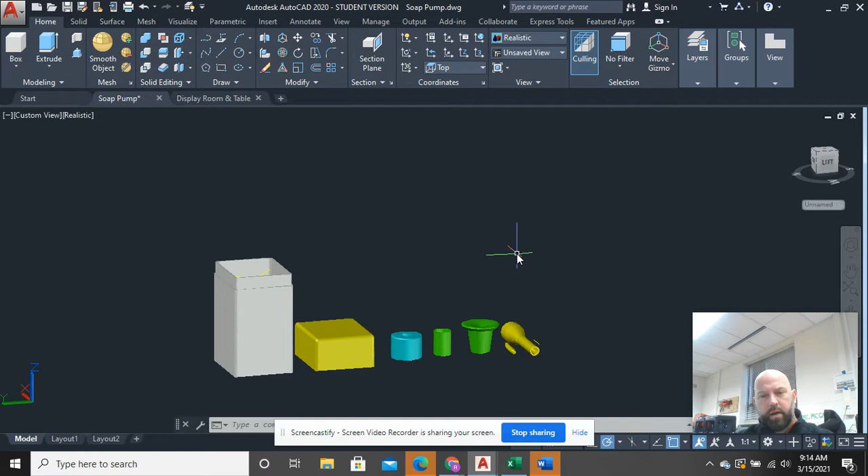So the next thing I have students do is make a table. Here's my soap pump parts that are going to be put together and then rendered. That'll be my final thing that I do.

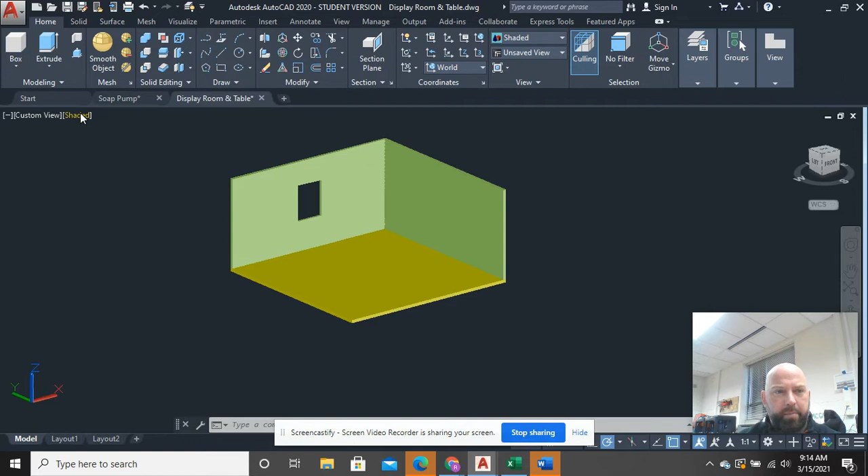I'm going to document how some of these parts were drawn because they're all kind of full-scale pieces. Here's a little room I drew, and I'm going to plunk a table down in this room, then put my soap pump on top of that. That way I can render everything and add lighting.

First thing I'm going to do is draw a table. I'm going to go to a top view and draw my table, utilizing the corner of the floor and just go from there.

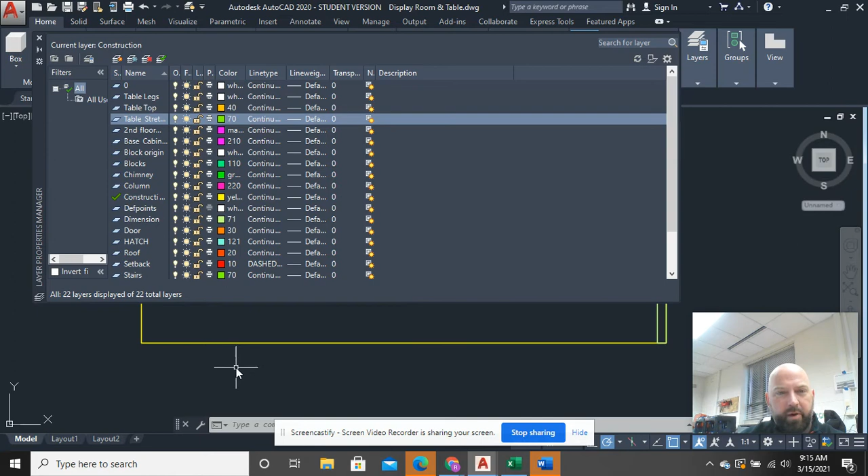Now on layers, I would make one called table legs, keep that white, make another one called tabletop, and make that one orange. I'll make one more and call it table stretcher, stretcher being like the skirt piece that would go around the frame. I stole this template from something I used for an architecture class, so everything is in feet and inches.

For table legs I'm going to use 3x3 legs and probably 1.5 inch stretcher pieces. So I'll go at 3, 3, and enter.

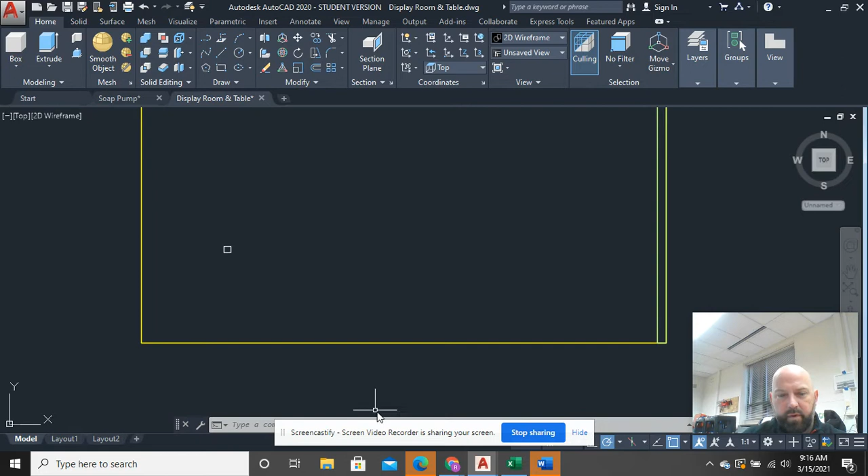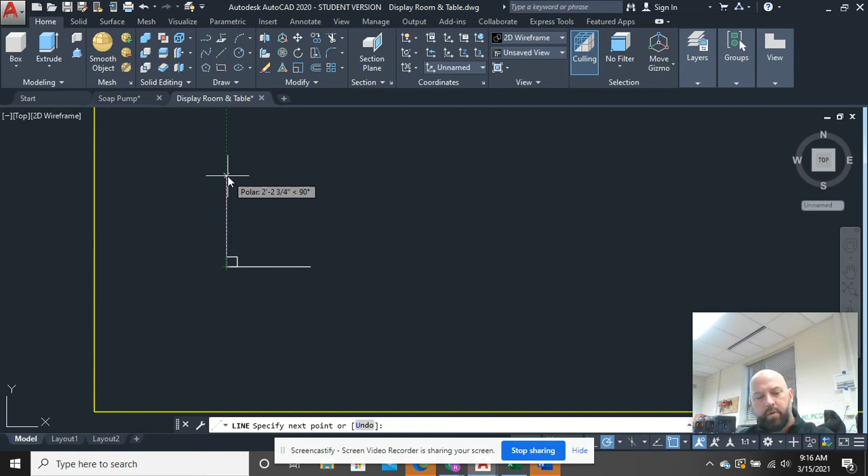I'm just going to draw a line. From outside to outside on this table, I'm going to make it 24 inches, and I'll make this one 24 as well. That way I can just go ahead and copy one leg.

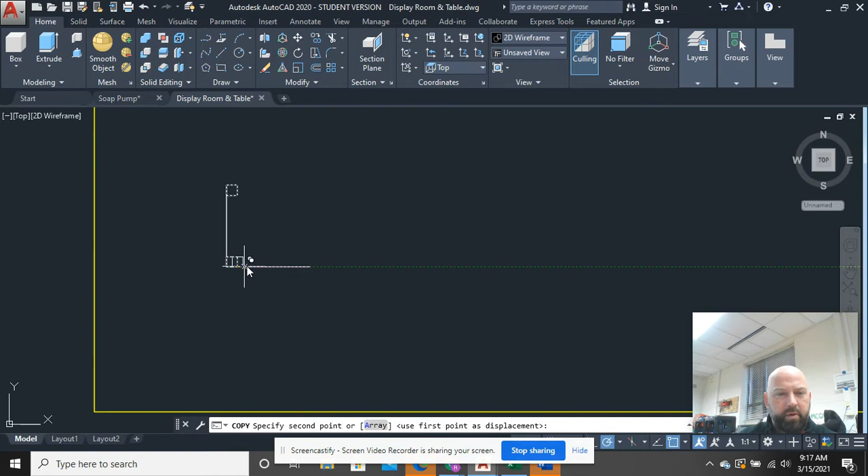For this first video, I'm just going to do this table in two pieces. First, all the two-dimensional parts you'd need to make the three-dimensional structure. Piece of cake. So now we have 4 legs that are all 24 inches apart.

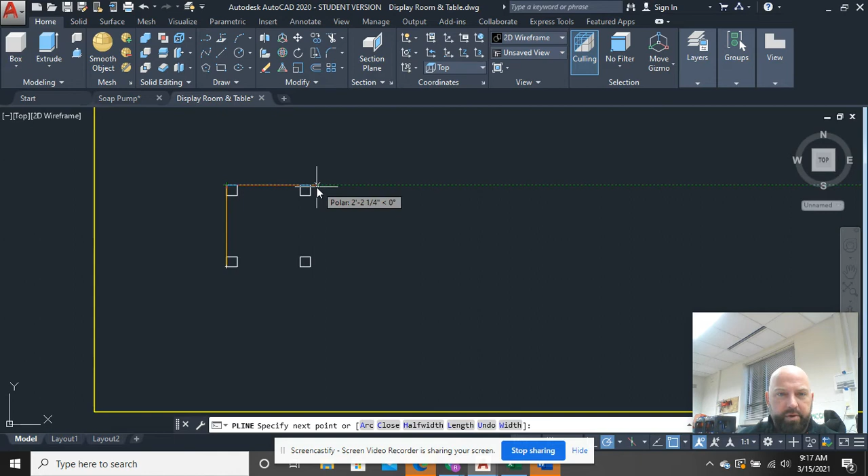Now I'm going to go to my tabletop layer, and I'm going to use a polyline and just run right around this structure. The tabletop is actually going to overhang the legs, but by doing it this way, I can offset it 2 inches.

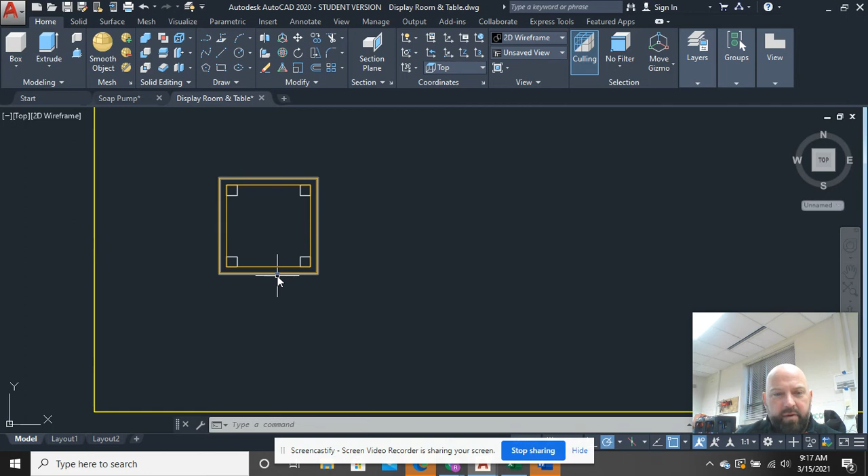Remember, you're not going to be able to offset in a perspective view at all. So when it's time to put the top on, I can take this and move it from this exact grip where I'm hovering, right to the top of my legs.

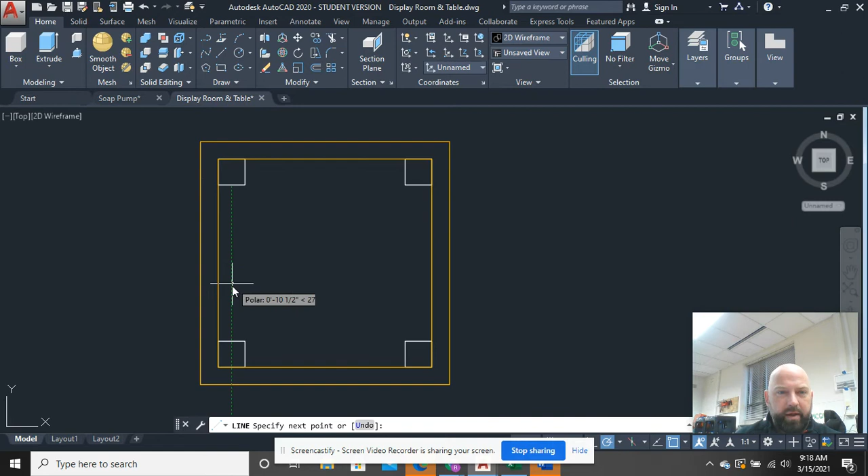Now I'm going to do my stretcher pieces. I'll get my table stretcher layer and draw a line. I only have to do this to 2 of them, and then I can copy these. I could just do it once and then rotate it when I'm done. I'll offset 0.75 because I want a 1.5 inch wide board.

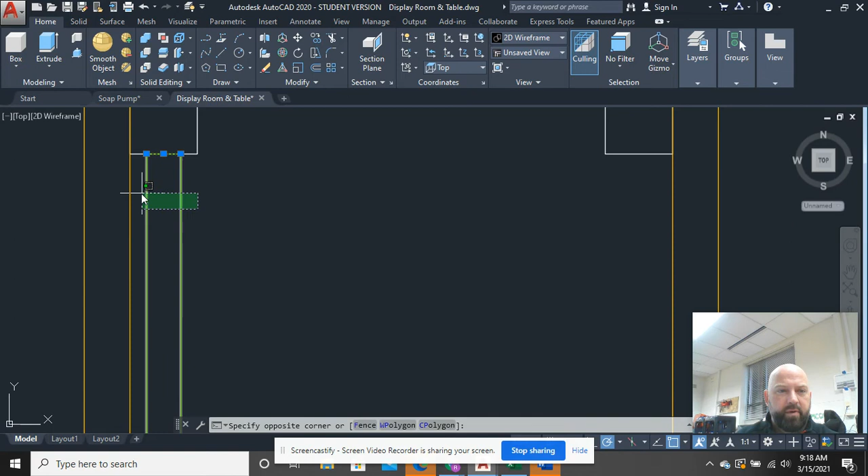Now I no longer need that. I can draw a line between here and there, select these and join them, then one more line between here and here, and join that with that.

So now I have this one, which can be on this side, and I'll rotate one of these 90 degrees, then copy it and drop it right there.

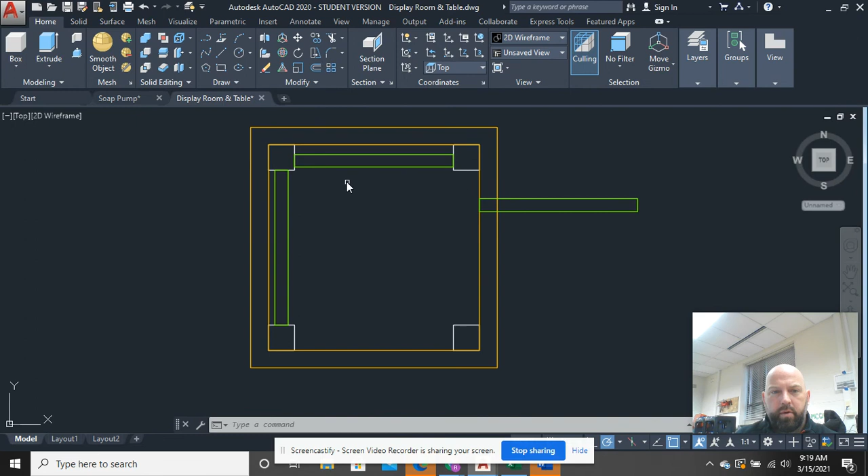Must not have grabbed it from the end, so I'll move it from here. There we go. I don't know why it didn't hit that again. I'll move this one from here to there and copy this one.

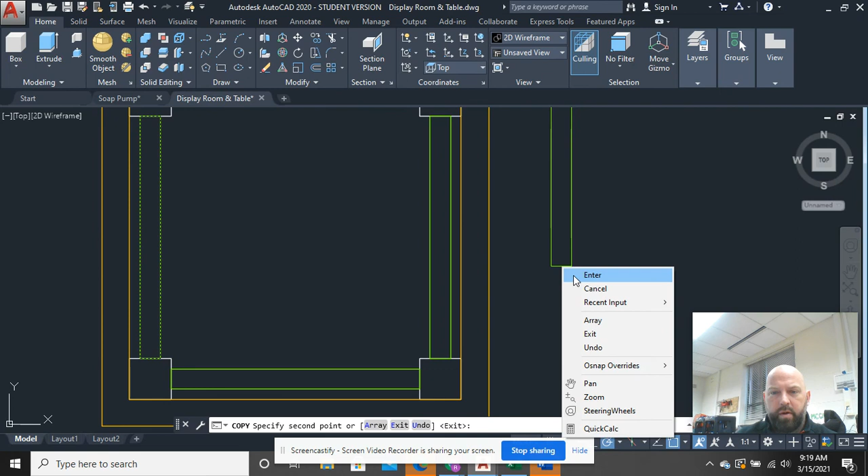While I'm there, I'm going to take my stretchers and copy these because I want a second set, one for the top and one for the bottom. At this point I've made all the 2D parts I need: 4 legs, 4 stretchers, 1 top, and then 4 top stretchers.